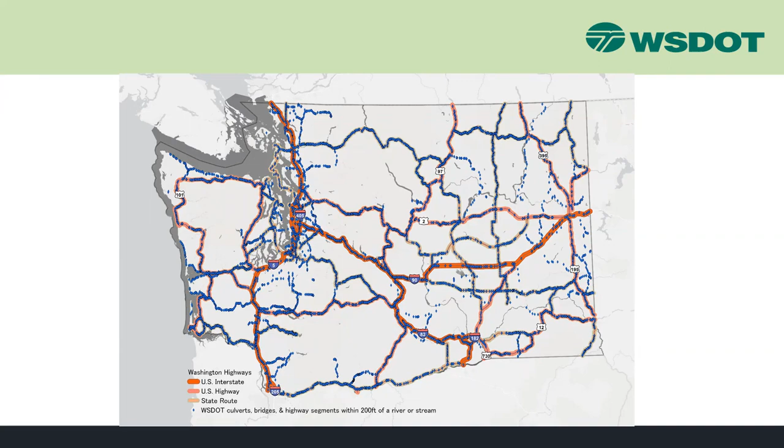Now, I don't need to describe why using wood in stream restoration is a good thing. You all know that. But it has taken some time for this department to understand the value and to accept some of the uncertainty in wood design and behavior. When I first started at the department, the state hydraulic engineer stated emphatically that WSDOT does not place wood in streams. Coming from the restoration world, this was a shock. However, during this time, WSDOT was already beginning to use large wood in special projects. I'll get to that later.

So in 2007, large wood was used only in a few bank stabilization projects, but by 2009, an instructional letter, a supplement to our hydraulics manual, was produced to address some aspects of wood design. Then in 2010, the hydraulic manual included 3 little paragraphs on large wood. However, by 2016, a greatly expanded instructional letter was produced. And in 2019, a whole chapter on large wood was added to the hydraulic manual. Currently, WSDOT is the only state DOT whose hydraulic manual addresses the use of large wood.

Later this year, interim guidance on large wood will be issued, incorporating lessons learned and new research. For a good pictorial examination of WSDOT's use of large wood, I recommend seeing Tammy Schmidt's poster in the poster session. So we do need those stinking logs now.

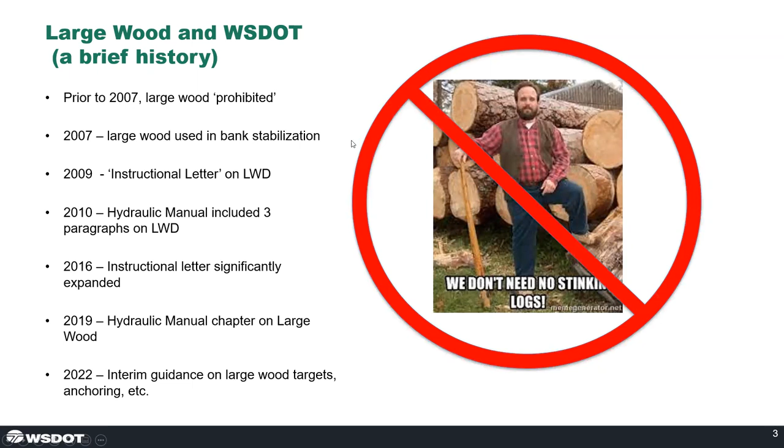Now there are several projects or types of projects where WSDOT uses large wood. Since the early 2000s, the Chronic Environmental Deficiencies or CED program has used wood. CED projects are sites that have had repeated issues that are stream or shoreline related. Then there is the Fish Passage Barrier Correction Program, which has the largest number of projects that incorporate wood. And as a subset of fish passage, or even some mitigation projects, we may use wood to achieve specific hydraulic and habitat functions. Lastly, we are increasingly using wood in emergency stabilization projects. Now we'll get into each of these in a bit more detail.

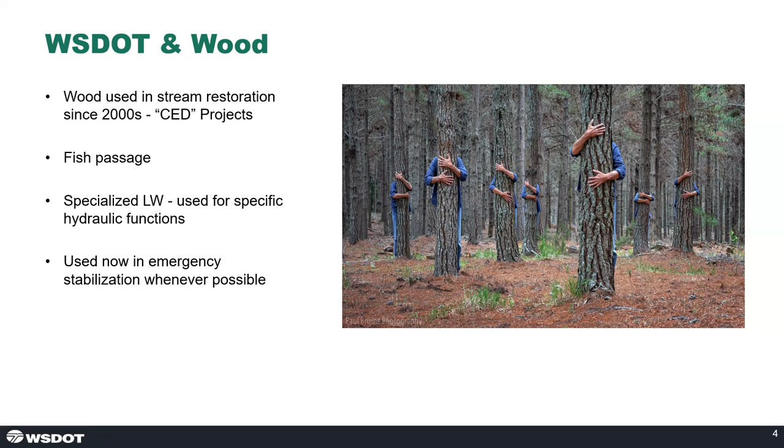The Chronic Environmental Deficiencies Program was created in 2001. And dozens of projects within the CED program have used wood in stream projects since then. You can see Jenny Dykstra's poster in the poster section about this.

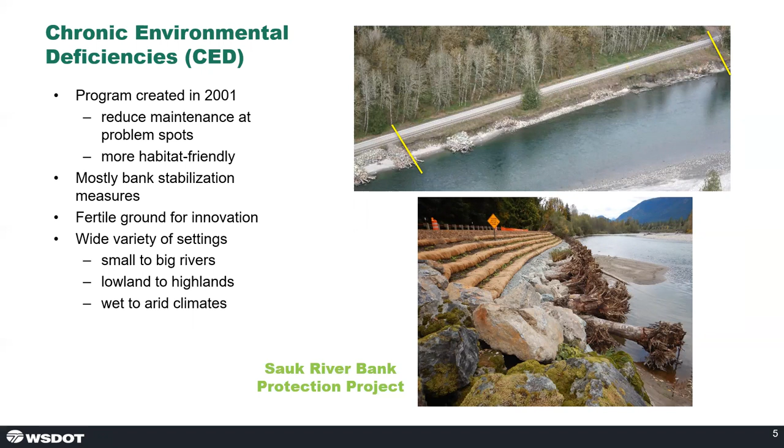The right side of this slide shows a highway with a major river, the Sauk River, migrating towards it. Several different treatments were attempted over the years, some under the CED program, but ultimately a more robust and continuous treatment was needed. So in 2019, we designed and built the structure shown on the lower right. This project incorporated about 400 feet of large wood at the toe of the bank. The riparian plantings have taken off, and as of now, you can't see the river at all from the highway. Additionally, the large wood has prevented any additional migration towards the highway at this location.

This project on the Skagit River in North Puget Sound was constructed to prevent a meander in the river from entraining along State Route 20. Riprap had been added over decades in an ever lengthening span of rock.

This project was featured in a presentation at this conference 7 years ago, actually. The photo on the left shows the site in 2010 with the leading edge of the meander migrating down valley. The default response at the time of adding more and more lengths of riprap was recognized as contributing to the entrainment of flow along the highway, as well as being poor habitat. The upper right photo shows a portion of the project as it was built in 2014 in the location where a side channel had begun to get entrained along the highway.

The project included dolo timbers, which is a combination of concrete jacks and large wood. These elements provide roughness, distributing and absorbing shear stress and providing stability for the highway and racking and accumulation of wood floating down the river. The photo on the lower right shows how the structure has accumulated wood. The yellow dashed lines show approximate accumulation each year, with a very large accumulation of wood in November of last year. And if you look at the photo just above that, it shows the project just after it was built in 2014.

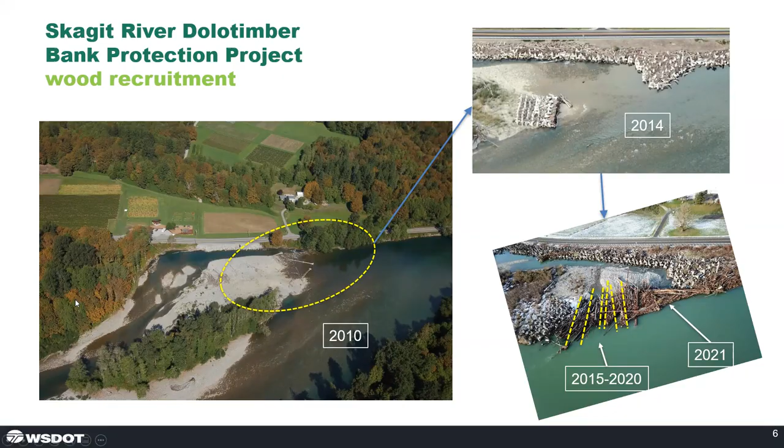Our largest use of wood these days is in fish passage projects. With hundreds of barriers to correct, we don't just correct passage, but provide partial habitat restoration. First and foremost, we determine what are the design objectives based on examination of the project reach. Ultimately, each log should have a specific purpose. We have established targets for wood that are based on the recommendations in the paper by Fox and Bolton in 2007, which remains the best source for data on wood occurrence in unmanaged streams.

We try to minimize the use of anchors wherever possible. The fewer man-made elements in the system, the simpler the construction. We also try to mimic natural wood recruitment by adjusting log dip angle and orientation. However, this must be balanced with the need to have effective and persistent habitat function. All of these are subject to site constraints, limitations with physical space, potential for backwatering or erosion of adjacent properties. And not surprisingly, our sites often have considerable development around them.

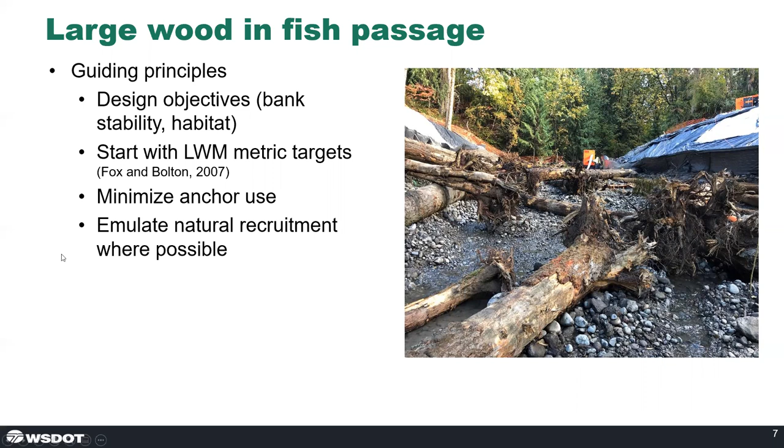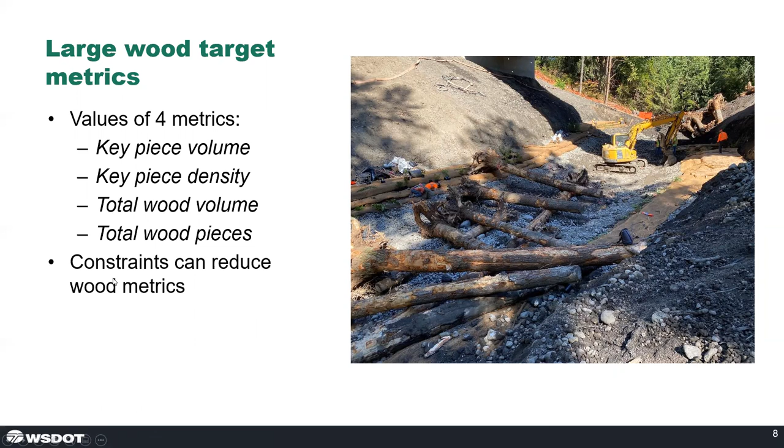Now, a bit more on those wood targets. Our large wood targets are based on the recommendations for land managers in the Fox and Bolton paper. We use the recommended minimum volume per key piece tied to habitat zone and stream size as defined by bankful width. For key piece density, total wood volume, and total number of large wood pieces, we use the 75th percentile of measured wood, also tied to habitat zone and bankful width for our targets. Total wood volume includes both key and non-key pieces, and is usually the dominating factor. And obviously, site constraints can reduce the wood metrics.

To help with implementing these targets statewide and with numerous consultants and design build teams working on fish passage, we developed a spreadsheet called the Large Wood Metrics Calculator. This implements the targets of Fox and Bolton and allows the user to simply enter the stream regrade length, bankful width, and habitat zone. This and other project information is entered into the salmon colored boxes. This spreadsheet produces the target values for the site shown at the bottom. It will also determine if a certain size of log is a key piece or not.

Now, importantly, we include the length of the stream crossing structure measured in the upstream downstream direction within the total stream regrade length, even though we don't actually place wood in culverts as a rule. Once the targets are determined, the user can adjust the log dimensions and quantities in the yellow boxes based on the project objectives and iteratively meet the target values. Now, I don't expect you to follow the fine print in this spreadsheet. This is just meant to show a screenshot of this tool that we've made available.

This results in a large amount of wood, and it may be challenging to fit at a project site. We encourage creativity in log placement to get as close to the targets as possible. This might include placing wood beyond the channel regrade limits, using existing trees or other features to provide stability. Another tool that we use is the concept of mobile wood. Our default design discharge for large wood is the 100-year flood. Mobile wood we define as becoming mobile at a design discharge less than the 100-year flood. The design flood for mobile wood will be dependent upon habitat objectives and site constraints, such as downstream culverts.

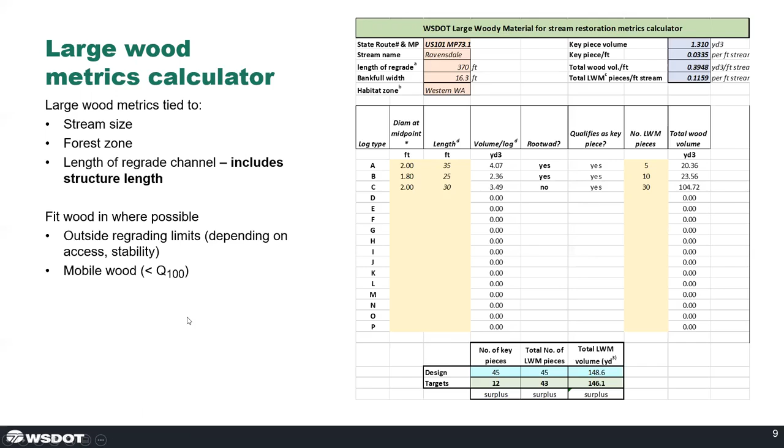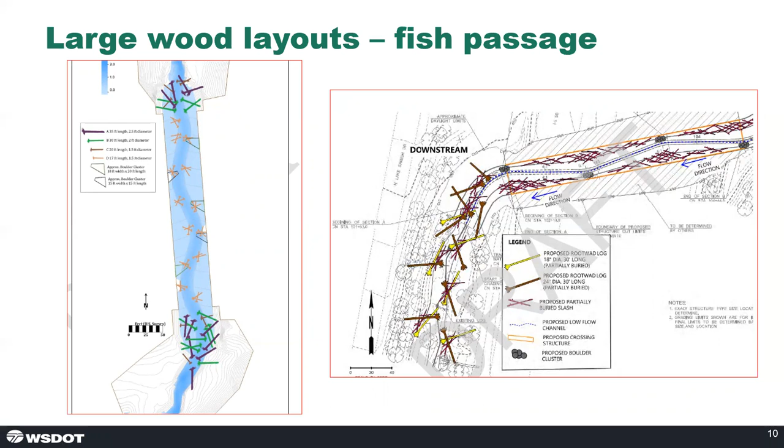Here are a couple of current examples of large wood placement in a stream crossing setting. Note that these are both preliminary. In both of these examples, at least one large wood metric was not met, although the key piece metrics were met. The amount of channel regrade, especially in the example on the left, was very small, limiting the physical space available to place wood. This design uses mobile wood in the culvert to increase the wood volume closer to the targets. Both designs feature wood placed outside the regrade limits.

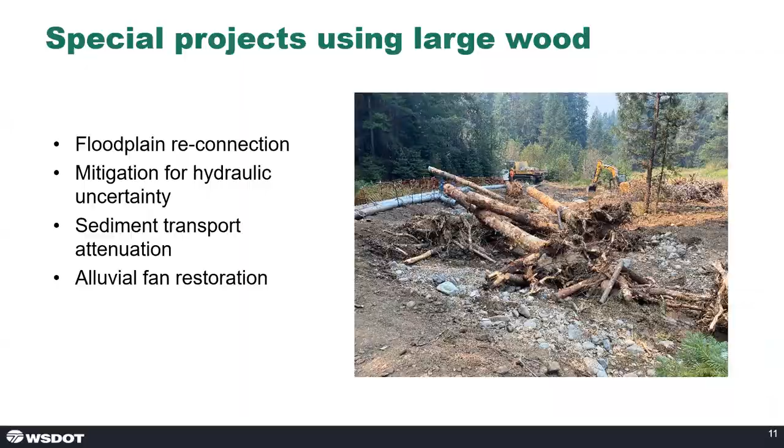I want to provide a bit more detail on some of these special uses. At Swauk Creek over in Kittitas County, we partnered with the Mid-Columbia Fisheries Enhancement Group. Their goals included floodplain reconnection, and they recognized the potential savings in mobilization costs by teaming with WSDOT. They provided most of the trees, while WSDOT provided the design and construction oversight on a half a mile of stream. WSDOT replaced 2 fish passage barriers with passable structures, including 1 bridge. We installed over 200 pieces of large wood in a half-mile stream channel.

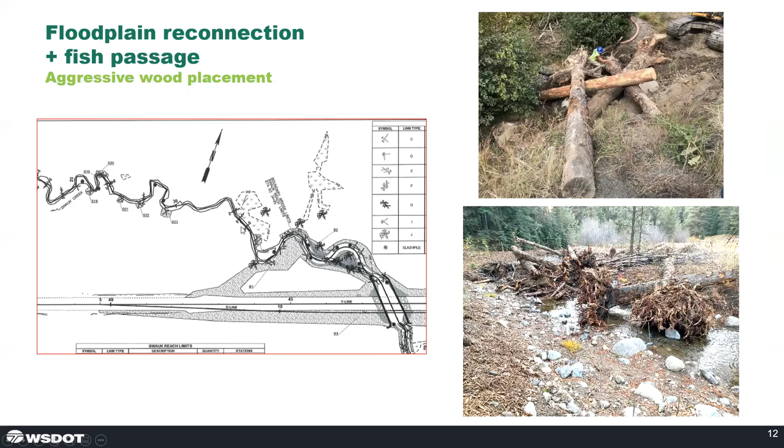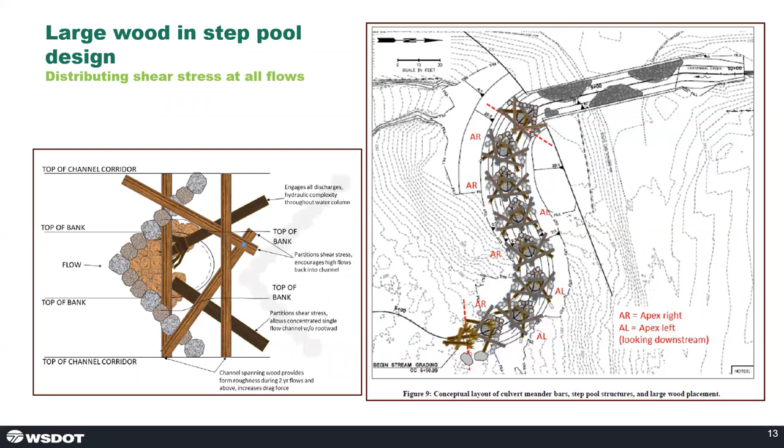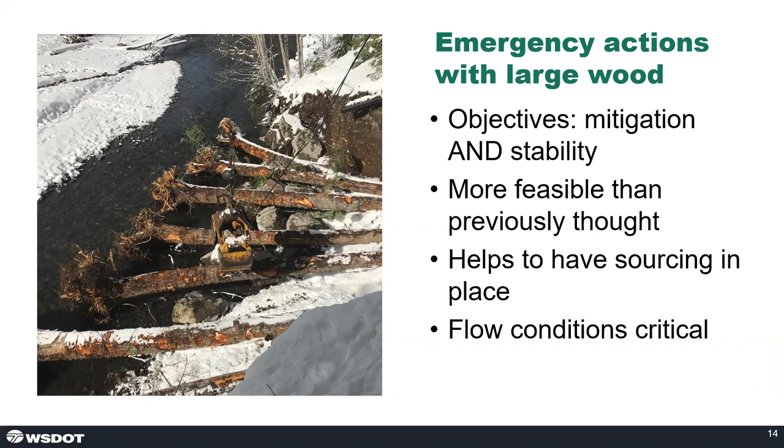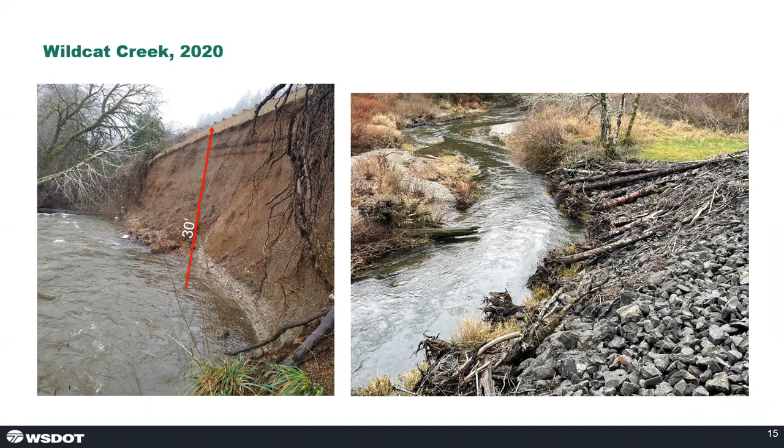This example from west of Olympia involved a nearly vertical bank 30 feet high with the highway right above it, shown on the left. On the right is a photo taken last fall at the site, showing that while there is a lot of rock, there's also a lot of wood where it counts.

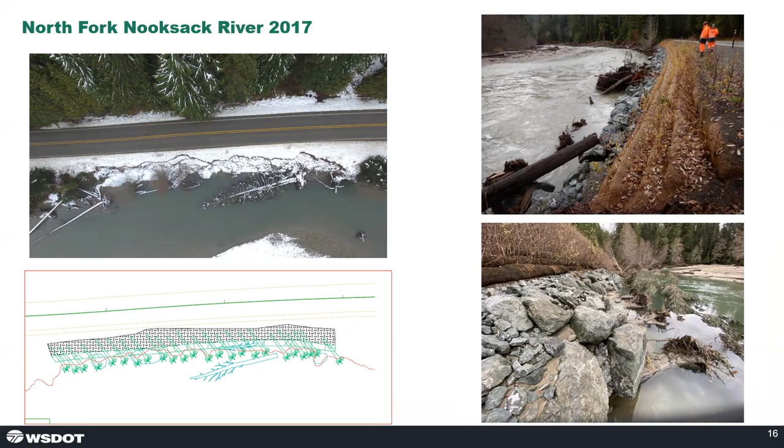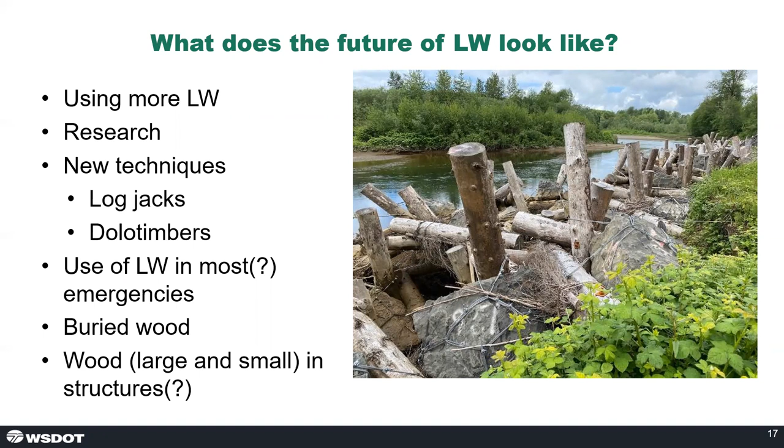I'll close by showing this emergency repair on the White River in Washington, doing what we had hoped for, trapping sediment and wood debris so that hopefully it will be self-sustaining.